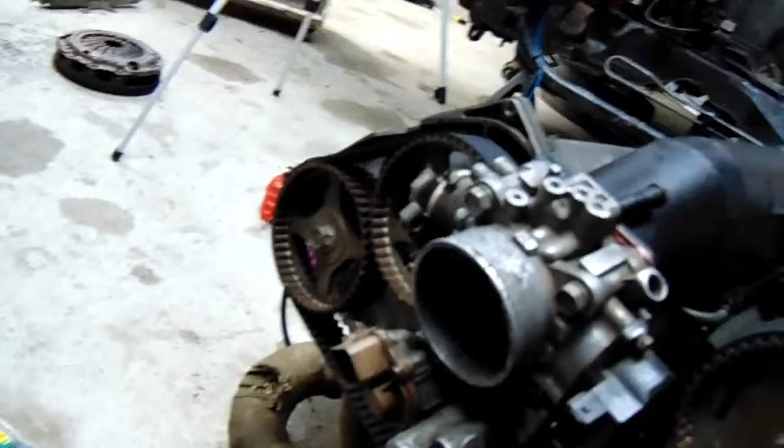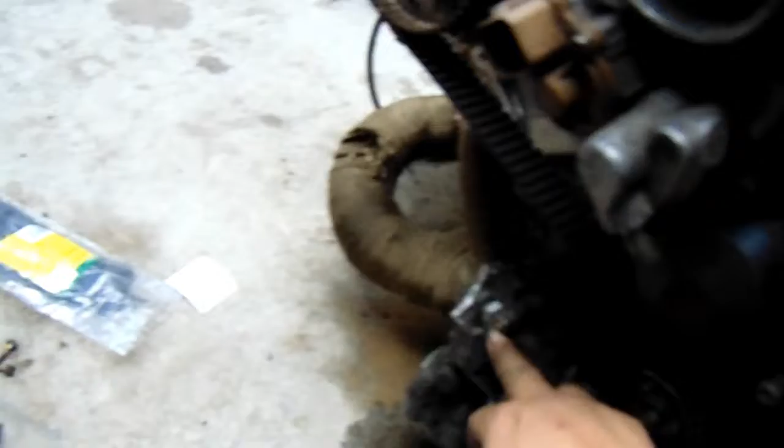So I've got the timing belt on now. I didn't do a time lapse of this, but she's all on now. The belt is off a 6G74, so off the 3.5 litre I think it is. It's a 265 tooth belt. It fitted on pretty easy, I just had to, because I had the tensioner that I had made, put a bit more tension on it to get it a bit further out. So she's nice and tight, marks all line up reasonably well. I've also done some digging and found my cam position sensor, so that's all on now.

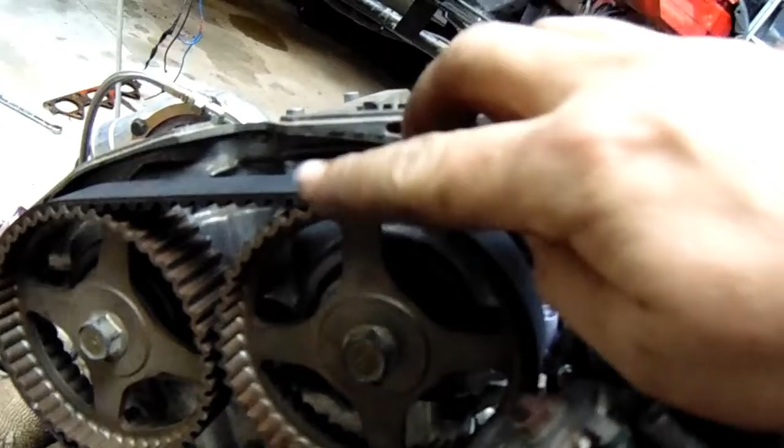So as for the timing, one of my mates, Brad, cheers Brad for letting me borrow one of your rocker covers, really appreciated. He had a spare rocker cover just sitting around, so he let me borrow it so I could do my timing marks, which are, as you can see, there, and the other one's down there. So I managed to time it all up, so now I've just got to put my other cover back on and transfer the marks over, so then for next time I put a belt on.

So that's pretty much it for the motor. I just got to glue the rocker covers down, and she's pretty much ready to go back into the car.

My friend Mike is coming this weekend to help me wire in the link ECU. It's not really wiring, it's a plug and play ECU. It's an Evo 1 to 3 link plug and play ECU. You can run them on the GTOs because they have the exact same plugs. I think it's 3 wires that you got to repin.

And I also had to, because I want to run the MIVEC, I had to swap over. I had to get an XS loom, which is just like an extra set for sensors and the outputs and inputs and stuff like that. It's just a small little loom that has like 6 or 7 more wires on it, and I can use them to run the switch for the solenoids on the MIVEC.

So we'll get that sorted, we'll get that in. Mike's also going to use all the sensors from my Defi dash to plug into the link, so the link can read all those temperatures and that. And yeah, we should be good.

So that's next, motor's just going to go back in. I've just got to hook the solenoids back up to the motor. And then I'm going to put the coils on and get some HT leads, which I might do because I've got to go into town today. So I might do that now, yeah, I might get that sorted now. And then we should be all sweet, and we'll get the motor back in and try and get it started.

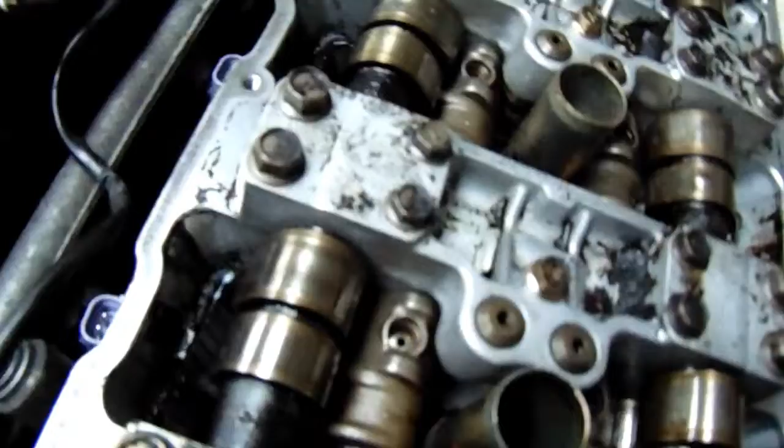Next up, I've got to pull these rocker covers off again. As you can see down in here, there's a nut with like a screw head on top, and they're all adjusters that I've got to set the adjustments on, so I'll get through that, do both of those. It's just easier to do while the engine's out of the car. I'll get that all sorted, and then I'll put the rocker covers on, and then I'm going to have to make some sort of lifting mounts to lift it in and out, but we'll cross that when we get to it. So we'll get these lifters all adjusted and go from there.

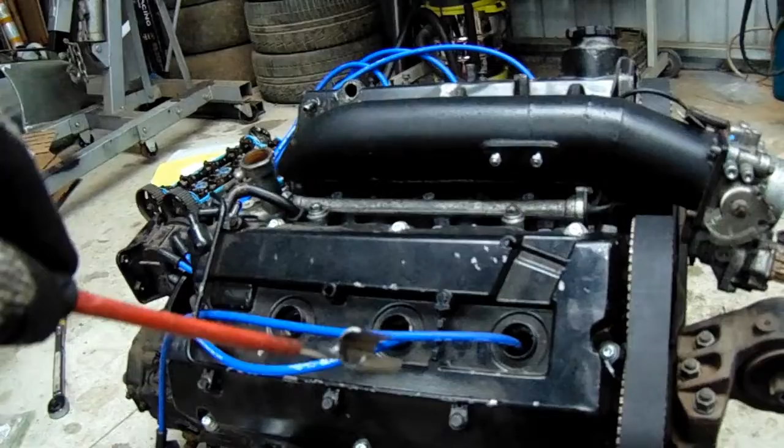Alright, so she's all together. As you can see, I'm running leads, not coil-on plugs or anything, because I don't have the coils for it, so I'm just going to use the standard coils in the leads. I did have a couple of hurdles to overcome with these, because the tubes for the leads are so far down you can't actually get any force to push them onto the spark plugs. So I made myself a special little tool using an old screwdriver, and you just slide that in and push it down, and it clicks on top of the lead and pushes it in, so that's all good.

Sorry if I sound a bit funny, I do have a bit of a cold at the moment, so bed rest etc, but got to get this finished because Mike's going to be here tomorrow to start wiring it, so need to just chop on.

As you would have seen before when I was doing the lash adjusters, adjusting them up, I had this tool here, which is just the ring off a spanner welded onto the end of a short extension, and that just does the job really well. Just adjust it, loosen it off, adjust the nut, and then do them back up. She's all good.

Alright, so next up is getting it back into the car.

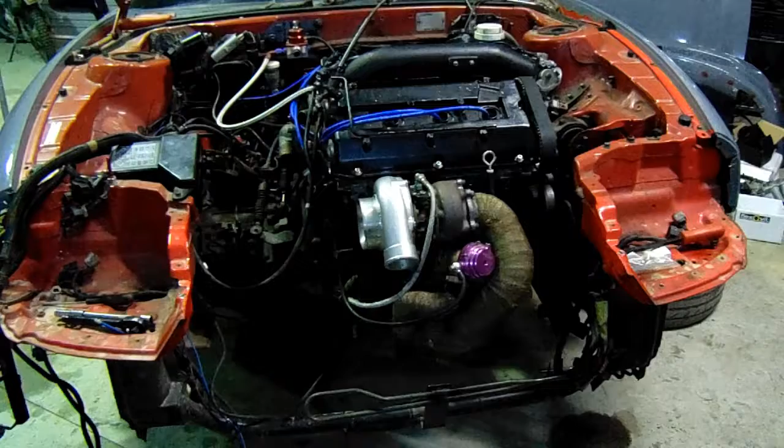So the motor's almost all back together now. Everything over here is all connected up. Fuel lines are all connected up, and the slave cylinder, gear selectors, the power steering's all hooked back up. I've just got to hook up the vacuum lines.

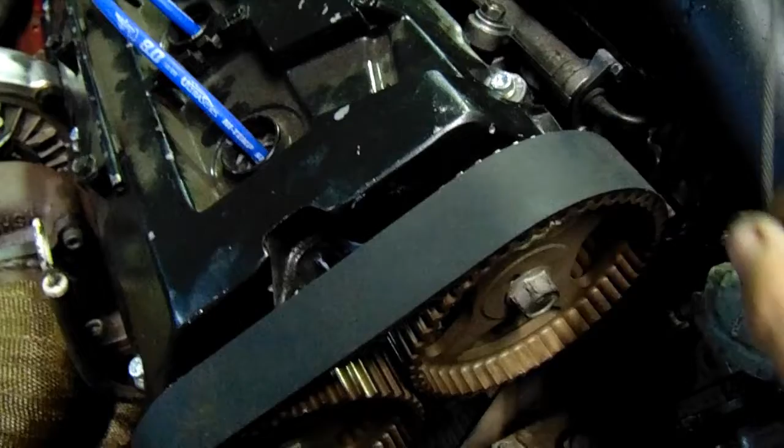Over the side, turbo, wastegate, screamer, exhaust, dump, all that's all hooked back up, so that's good. Just got to put the alternator back in. I have an issue here because the cams are higher, my throttle cable now rubs on my belt, so I'm going to have to make something to lift it up a little bit, but it's not a big deal.

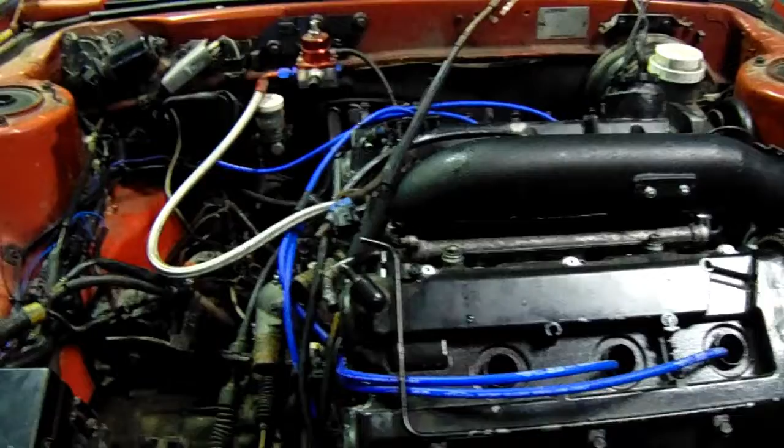So yeah, we're getting there. I've just got to go under and bolt up the exhaust to the rest of the exhaust, and then I can start doing things like fitting in and seeing if my new radiator fits, and some other bits and pieces. I want to hook the battery up and just turn the fuel pump on to see if I got any fuel leaks with these new injectors. If not, sweet as. If so, I need to try and get that sorted. So I might do that now and see what happens.

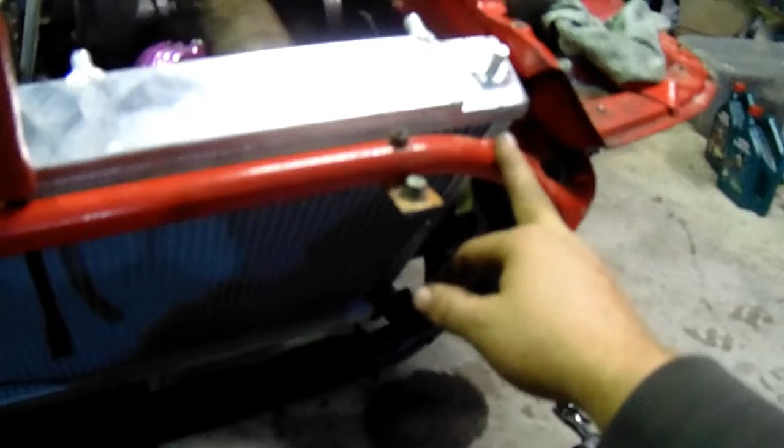Alright, so everything's hooked up now. All the exhaust is on, all the drivetrain parts are on, so it's literally just a case of wiring everything back together now. New radiator's in - it fits, but it doesn't quite. My original mounts here and here no longer will work, so I've cut them off, and I also have a bit of clearance down the bottom here.

Let's see if I can get the camera down there. No, you can't really see it. Hang on, let me just grab it like that. Oh crikey, that's too bright. Alright, so I also got a bit of clearance down there as well. So I just need to machine that back a bit more and see if I can get that all worked out pretty good. Then that will be sorted, that will be ready to go.

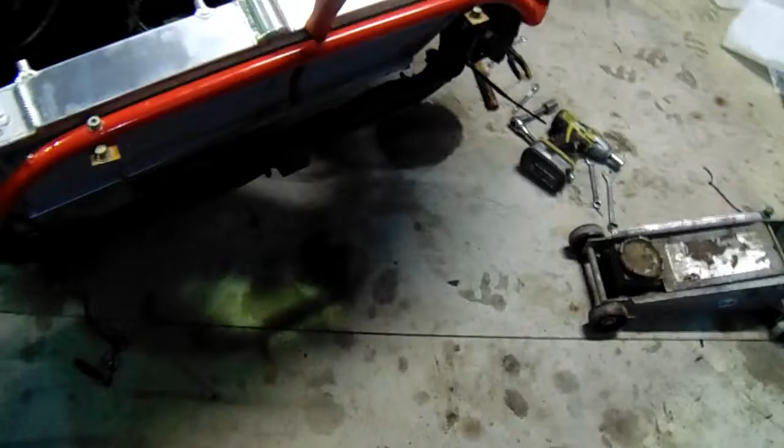Then it'll be a case of putting the intercooler piping on. I've got a weld blow-off valve on it, and the inlet air temperature bung on it, and get that sorted.

And then from then it's pretty much just up to Mike for the wiring. I'm not sure how much of the wiring I'm going to film, because I don't know if he wants to be on camera, and I'm not going to force him to do it. So if he doesn't, I'll just have to record the first startup, and then maybe afterwards I'll run through what he did.

He's a pretty onto it guy, and he's got it all sorted, so he's going to look after me well, so that's good. Hopefully next week we'll get it on the dyno. I can't guarantee that - it will just really depend on how life goes, I suppose. But yeah, no, it's all looking pretty cool. I'm pretty happy with everything.

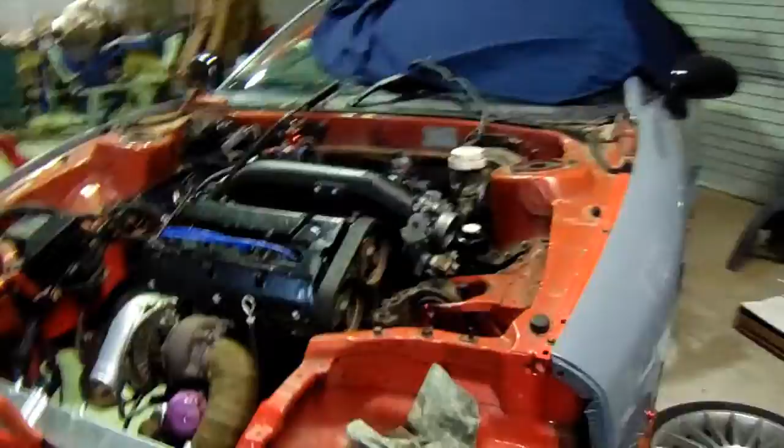No, I will have to do something for that throttle cable tomorrow. I've got lots of little pieces to keep me busy while Mike's doing the wiring, so yeah, it should be all good.

Alright, so next one you should see will be hopefully the first start if everything goes to plan. I can't guarantee it's all going to work out, I can't guarantee it's all going to go to plan. If it does turn to shit, I still have the heads down here - I'll just put the original heads back on, keep the link in it, and get it retuned like that. But we're going to try our best and see what happens.

Alright, here we go.

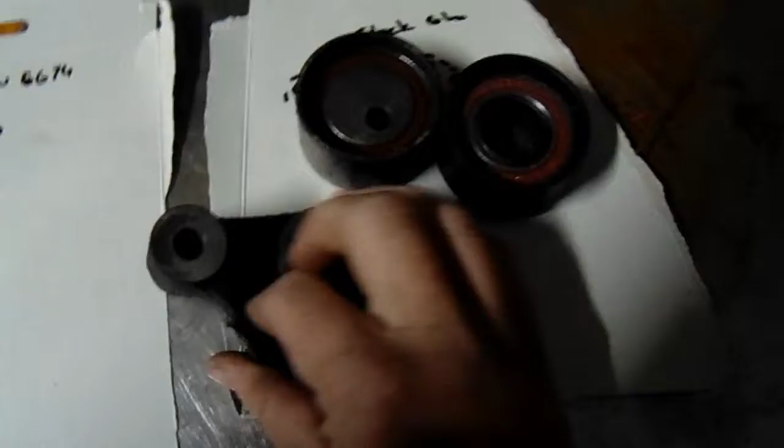I drew a diagram for you. So this is a stock GTO belt. It goes over one of these tensioners, up around the cams, down under the water pump, over the cams, back through one of these offset tensioners, which is mounted on the swing arm with the hydraulic tensioner, and then goes back around the crankshaft pulley.

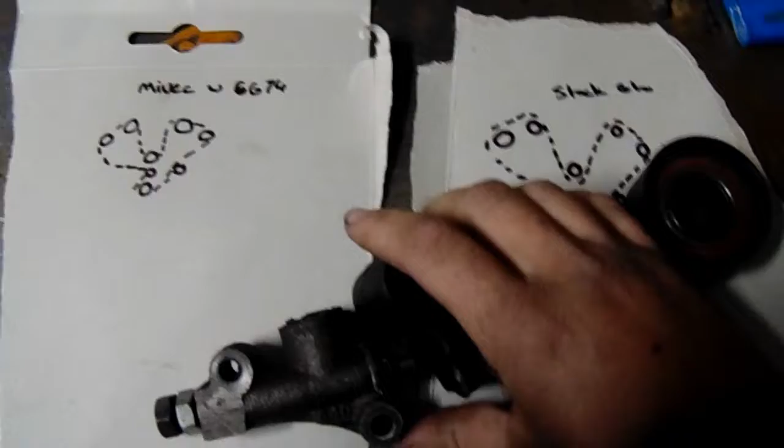Now with the Mivec one with the 6G74, which is this picture here, it pushed the belt so far over that this no longer was pushing out, but it was at the point where it was at its maximum.

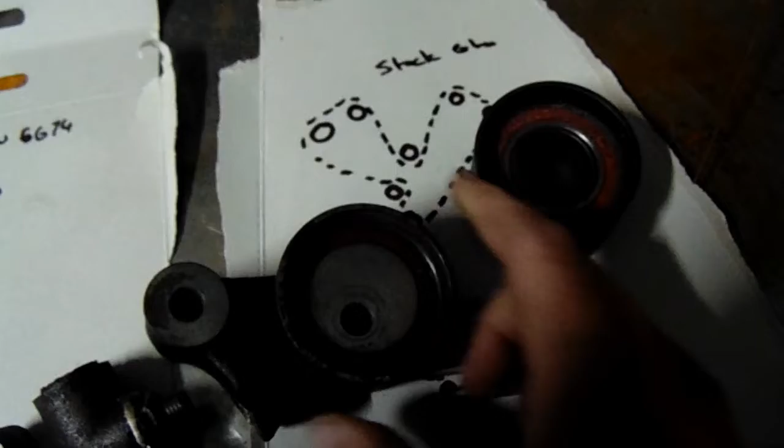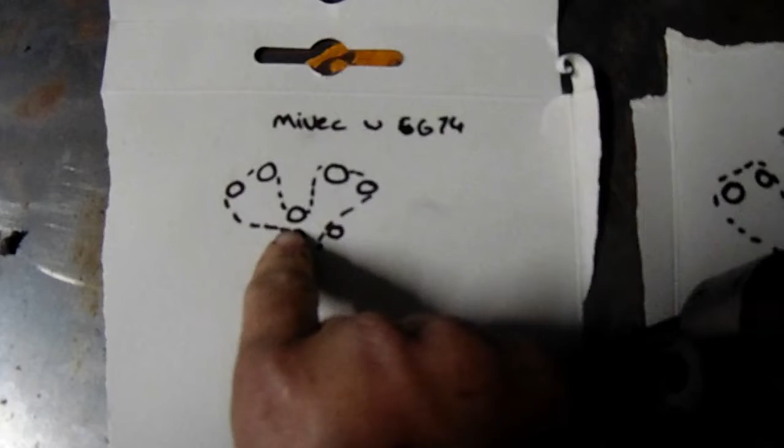And what was going to happen is, because the belt spins this way around and up and over, it was going to pull it up, and if it had pulled it up any maybe 10 mils, the belt was going to hit itself, which went around the water pump there, and that was going to be catastrophic failure. It was just going to be all over.

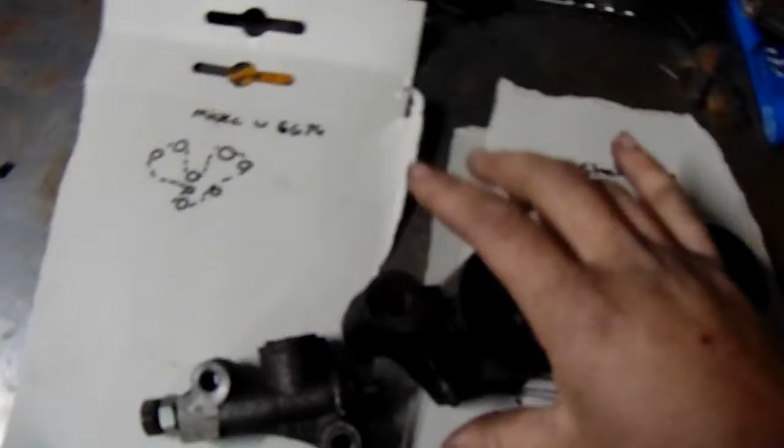So there was a lot of brain scratching and a lot of thinking, and we did come up with a solution which I'll explain to you in a minute.

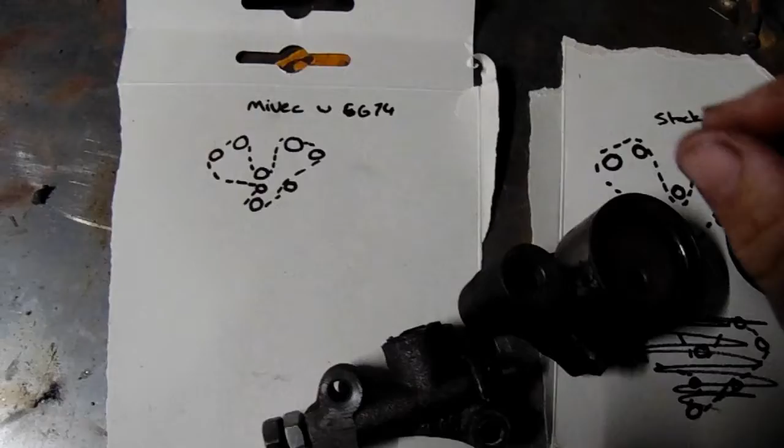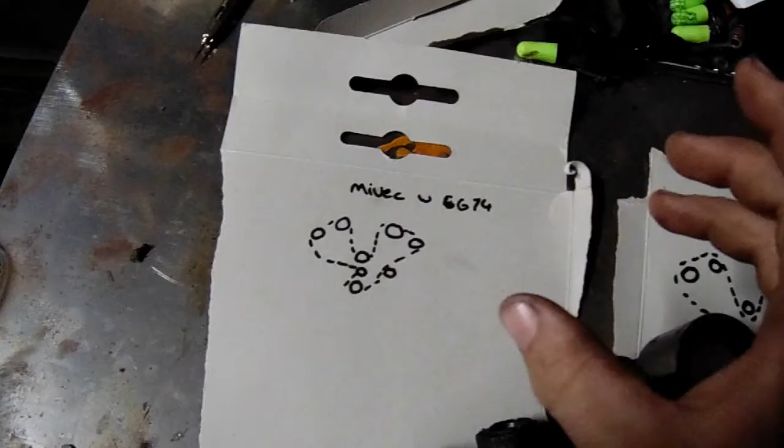But also we had to fit a crankshaft position sensor, and what we wanted to do was actually run the position sensor, because it's a 91 twin turbo engine, they don't have the factory crank position sensor like the 96s do, or even the Mivec.

Where's the Mivec crank? I don't know where it is now. Down here, as you see, the Mivec crank pulley has on it a trigger wheel. So as it rotates around, that goes through a Hall effect sensor, and what that does is it tells the ECU where it is in the cycle, etc.

I couldn't use this one because in the twin turbo oil pump there isn't a relief for it, whereas there's a relief for it in the factory Mivec one. So I couldn't use that.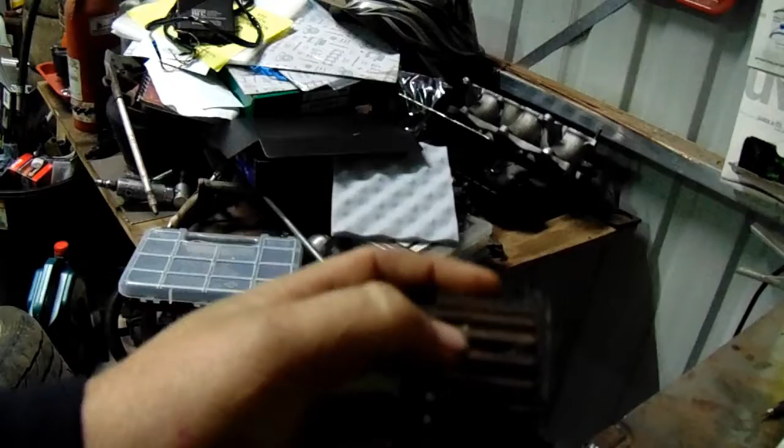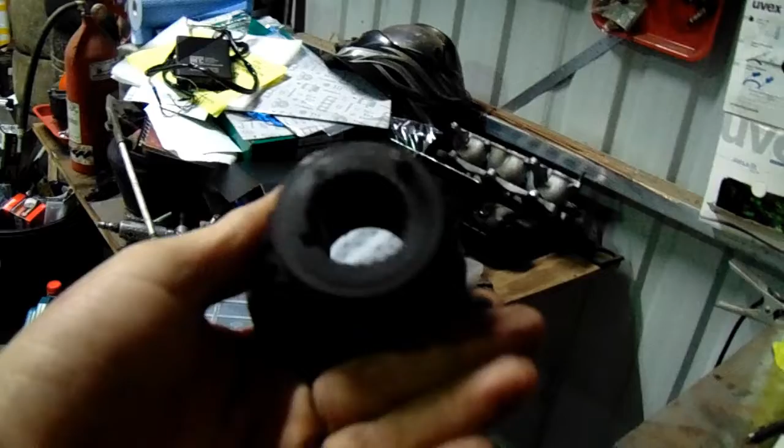So what I ended up using was another sensor which just read pretty much off each individual tooth, because the Link needed a sensor that could read a number of teeth that could be divided by 4, that could be divided into 360. Just luckily enough, this here had just enough teeth that could be perfectly divided into 360.

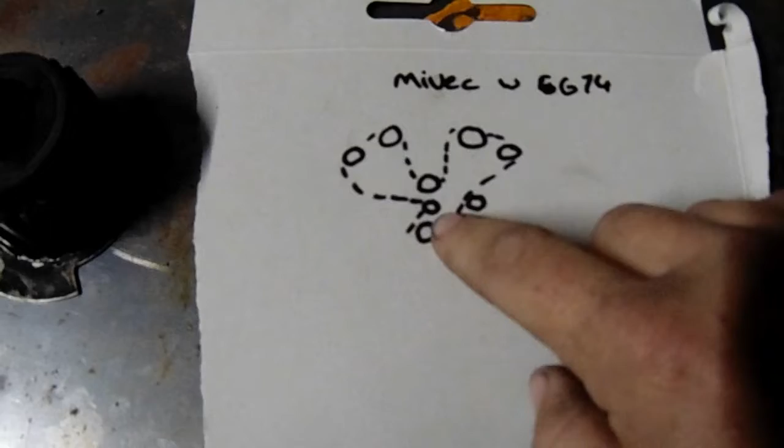So we mounted the crank position sensor right here in this gap between that belt and that belt. But with the longer belt, there was no room.

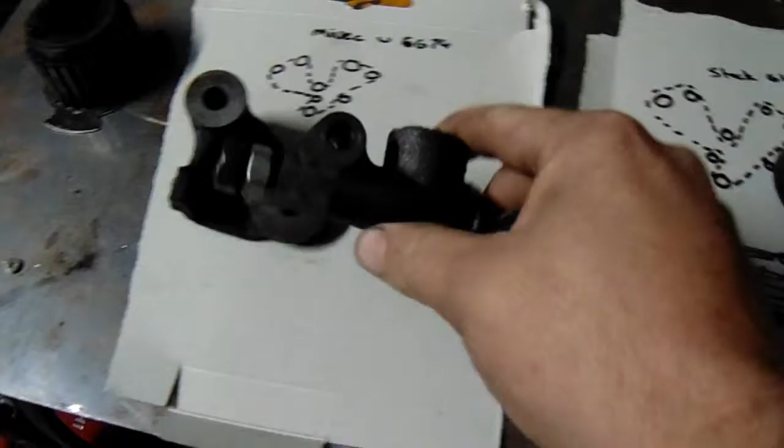So what we ended up doing is we ended up scrapping this whole setup here, and that setup there, so that's gone. And we ran this one in its stock location, that's fine.

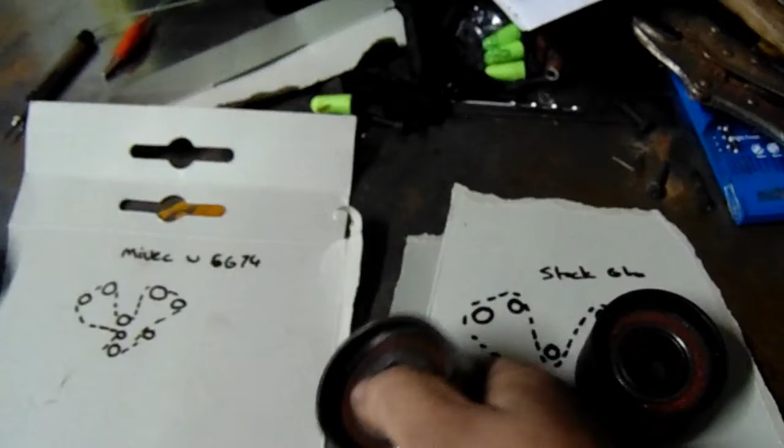And then this one here, I machined up a spacer that went behind here and bolted to where this originally bolted to the block. So that part there is where the pivot bolts to the block.

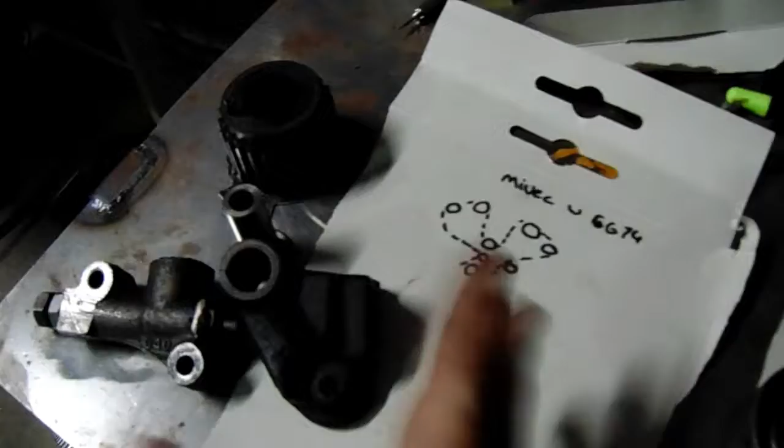So all you got to do is, if you ever wanted to do this, all you literally have to do is remove this, get rid of it, machine up a spacer that is exactly 33 millimeters that can sit in here and go to your block.

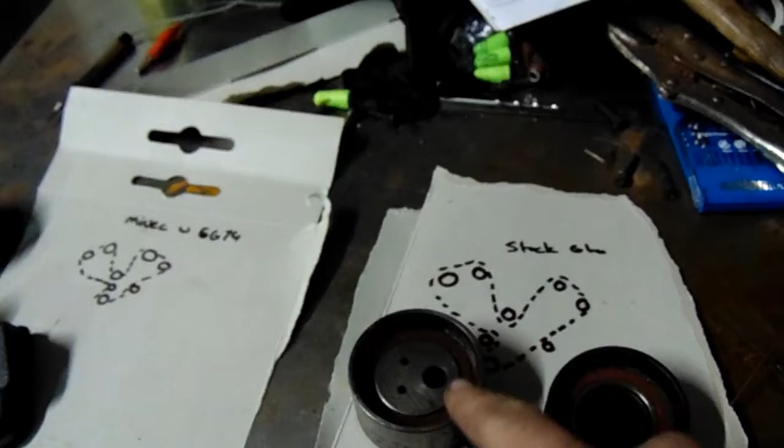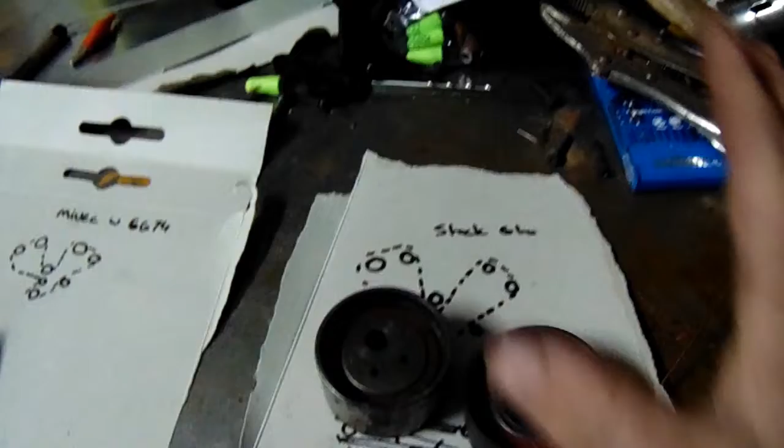You run your bolt through there. You don't do it up tight. You run your belt, get it all timed up. You put this one off like that, and as you're holding your belt, you just twist this around, because it's got the 2 holes there for adjusting, until the belt is at the perfect tension, and then you torque that bolt up, and it's done. And it is literally that simple.

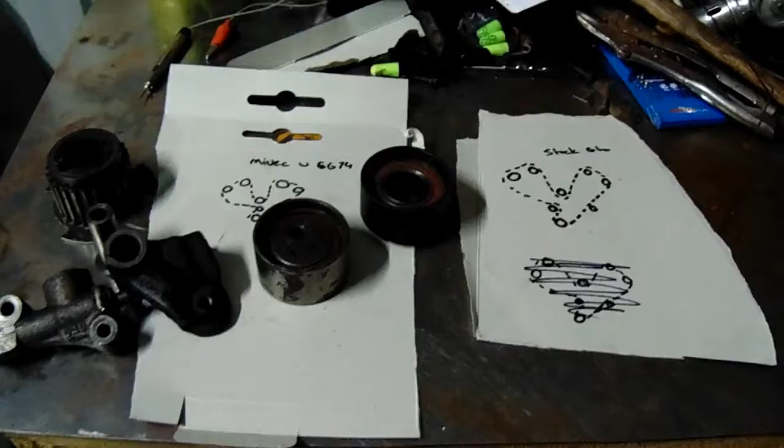And I don't know if some people are going to worry, it doesn't have automatic tensioning or anything like that. When I built my RB30, it never had that.

That was the exact same setup, pretty much using those exact same two pulleys, and I never had an issue with that. From memory, my RB20 didn't either, I can't actually remember now. But it's worked, so it's done.

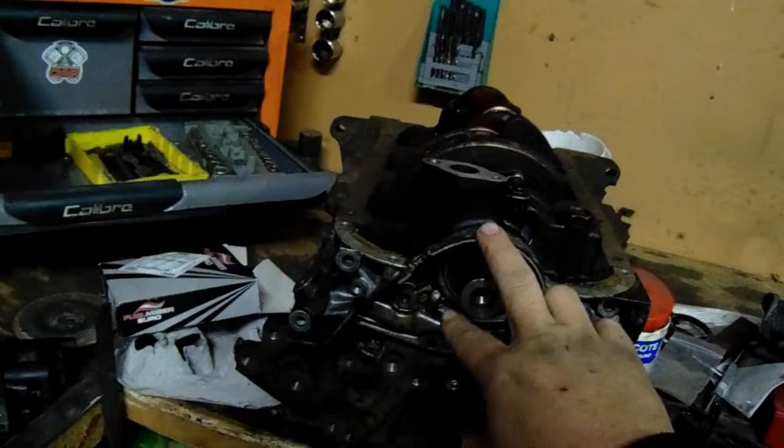I had to turn the Mivec block upside down and put the crankshaft in the oil pump, and at this bolt hole right here I ended up making a little bracket that came out which held the crank position sensor, and that sits exactly the right distance off the teeth. That was pretty much the biggest issue of the whole thing.

I can't really show any of it to you because the covers are all on, and like I told you, I didn't want to film while Mike was here because he was only here for a limited amount of time, and I didn't want to put him under pressure of being on camera. But now the car starts, it runs, not overly well because it's not tuned.

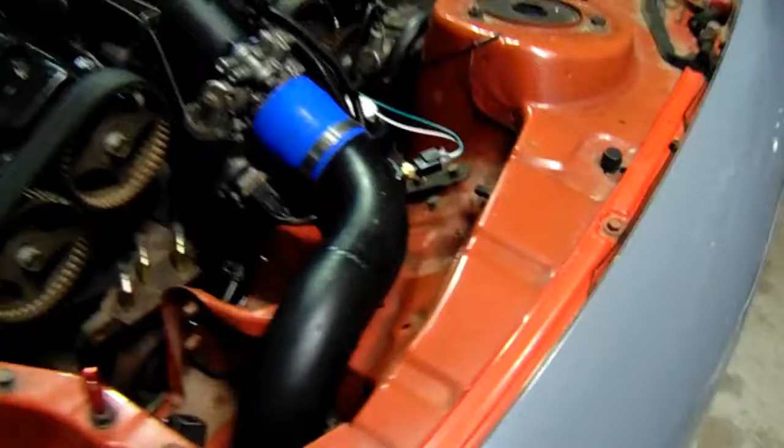I had to put in an inlet air temperature sensor. These wires are all going to be tidied up. Mike asked if I wanted him to tidy these up, and I said no, I'll sort that. He spent a lot of the time cleaning up my old dodgy loom in the car, and that looks pretty much perfect now. I'm extremely happy with that.

I had to rewire these coils. Normally on the GTO coils, that coil pack for cylinder 1 and cylinder 6 - no, cylinder 5 is there, and that one's there - but I just had to change them around because the leads I got weren't quite long enough to reach. These are Eagle 8mm leads. I had to run leads because I had the original coil-on-plug setup, since Mivecs run coil-on-plug on the back and then run leads around to the front. But I had the coils and the leads, just not the plugs to connect onto the coils, so it worked out easier to run this setup.

I think once it's all tidied up and cleaned up, it's going to look pretty cool. And if it doesn't break down under the power, I don't think I'll be changing it anytime soon.

Got the Mivec solenoids there and over here. They're all wired up, I just haven't plugged them in yet because I've got to run the loom through from the inside of the car out to here. But yeah, the car starts, the car runs.